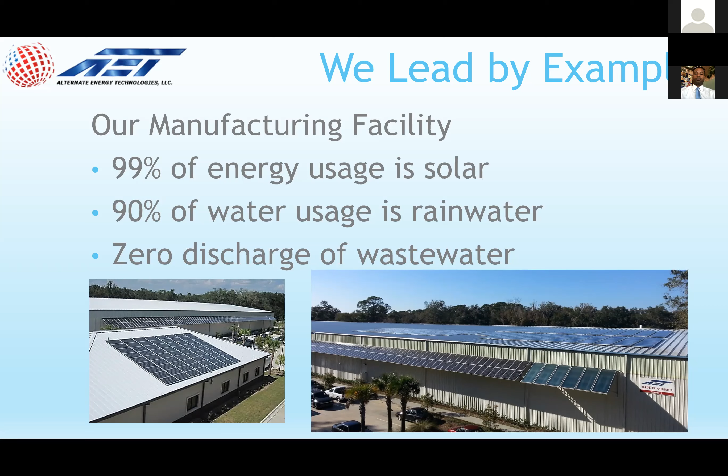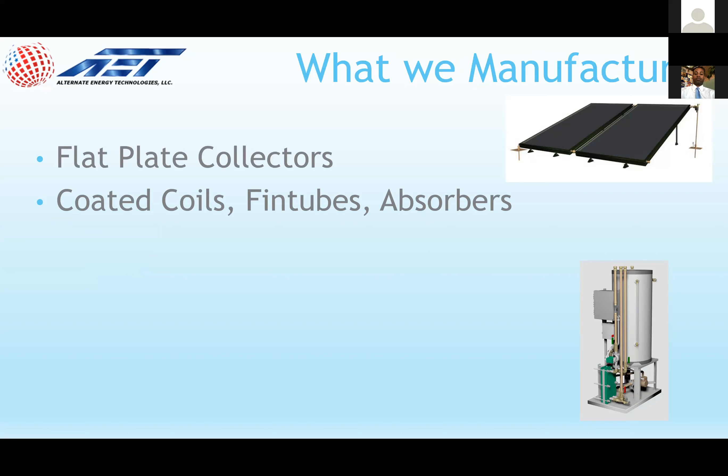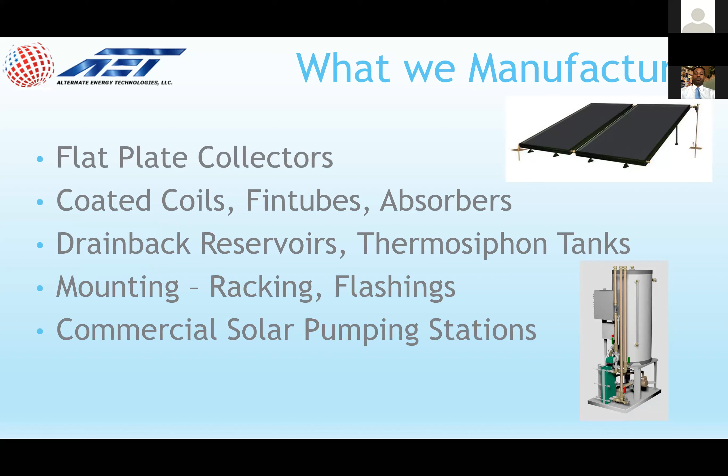So what we manufacture, in a nutshell, is the flat plate collector, of course, and, as I mentioned, the coated coils, fin tubes, and absorbers for other manufacturers on our Thermofin side of the plant. We manufacture drain back reservoirs with and without heat exchanger, and also thermosiphon tanks. And we have our own racking products, and we make our own flashings. And we do commercial pumping stations for both drain back and pressurized glycol.

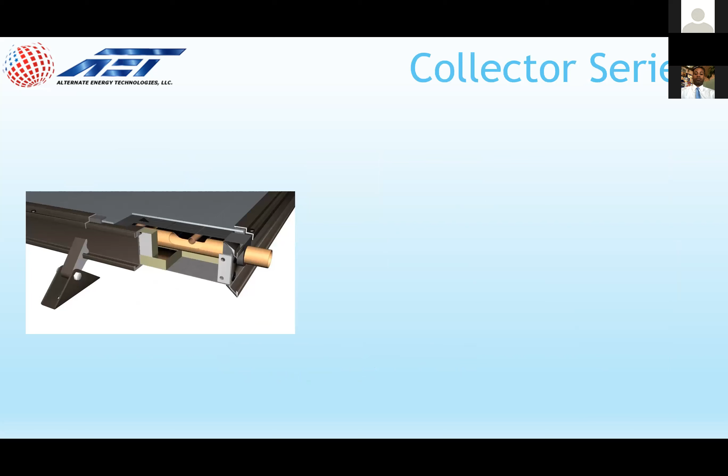The collector series: all of our products have basically the same absorbers inside with the selective coating. They're all copper. But the Morningstar has the anodized aluminum frame, and it's sort of like an I-beam finish you can kind of see. It's structurally very robust. We have 1-inch headers as our standard, and unions are optional. Some contractors really like them, some don't, so we can put those on if needed.

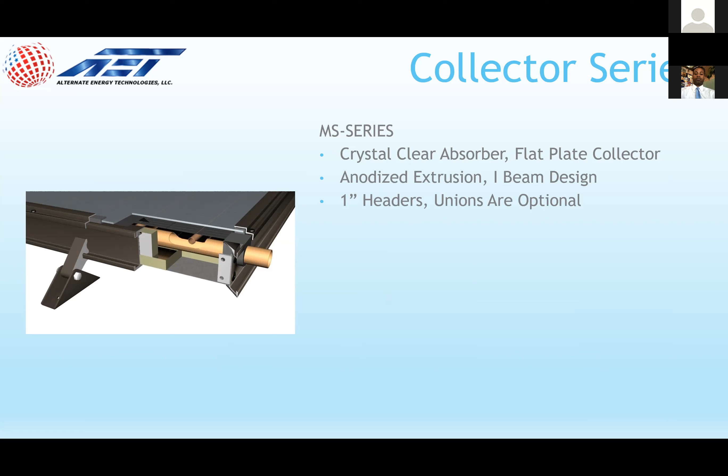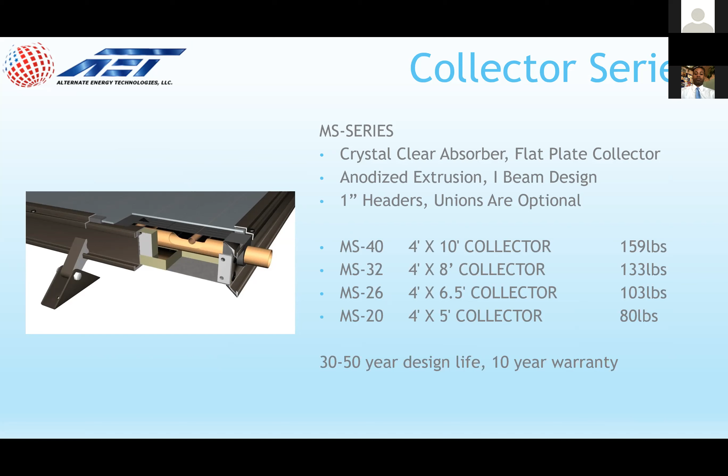We do make more sizes than this, but in general, these are our top 4. We have a 4x10, a 4x8, a 4x6.5, and then a 4x5, which is kind of square, kind of boxy. It's cute, and it's good for some applications. And then, as I mentioned, we have a 30 to 50-year design life with a 10-year warranty.

Some of the benefits of the Morningstar series collector is our anodized frame. As I mentioned, the I-beam extrusion, which is very durable, and then our mounting hardware is the best one on the Morningstar line. It's very, very fast and easy for rail mounting, for flush mounting. It's kind of like an alligator clip. It's very easy to use.

All of our absorbers are completely copper, so they're not made of any dissimilar metals. So they have a longer performance guarantee and are always repairable in the event of a failure or problem. And as I mentioned, they do have a 30 to 50-year design life with a standard 10-year warranty. Our warranty program, I'll highlight a little. We do have online claim filing. It's very simple.

We also have written into our warranty a corrosion provision. What that means is, in the state of Florida, we do a lot of direct open loop systems. And over the past 20 years, we've had a lot of water quality changes that can drastically affect a copper tube and an absorber plate, especially when being superheated by the sun. To combat some of those corrosion issues, we increased the wall thickness of the tube on our absorbers, and also added a 3-year provision to the warranty that if it corrodes in the first 3 years, we still cover it, even though that's not a manufacturer's defect.

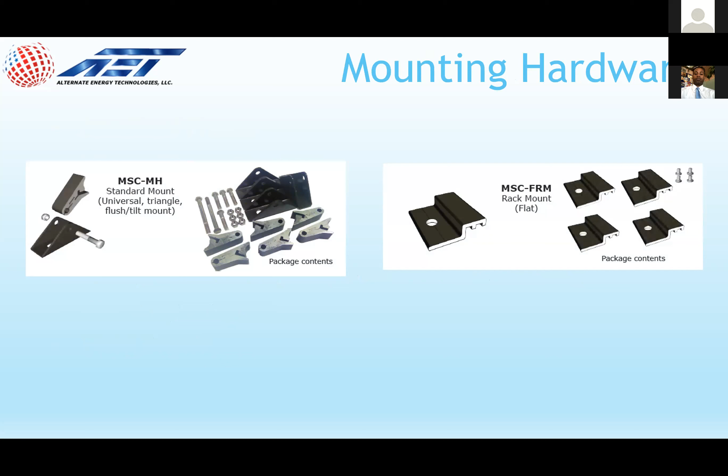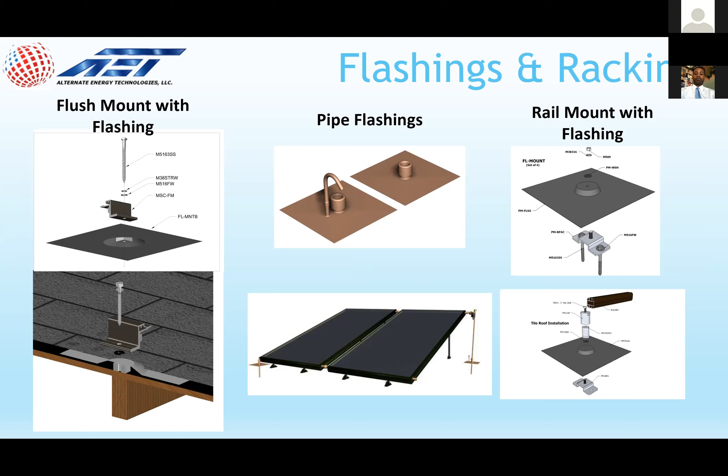And then our flush mount for flush-to-shingle roof. Our flashings, I'm just going to go ahead and get them all on. So the flush mount flashing we manufacture in-house. Our pipe flashings, which are copper, we offer in 3/4, ½ inch, and 1 inch with our little gooseneck for the sensor wire. And then our rail mount flashing as well that we manufacture in-house.

Of course, the opportunity for solar thermal, as we all know, is anyone that uses hot water. So what's your target market? Everyone. But no, commercial, high users, hotels, hospital, car washes, residential. Of course, you've got single family, multifamily, new construction, retrofit, and of course, any type of hydronic heating, space heating, radiant floor heating. And basically, we're just an energy source. So we can integrate into anything that uses or produces heat.

So solar thermal, as we all say, is the first step in going solar. It is the least expensive, most efficient use of solar energy, and it makes the most amount of impact of any renewable technology per surface area. I know that a lot of our contractors have been doing a lot more PV and they've been leaving thermal out. So I just want to highlight why it's important that we consider including solar thermal with all PV installations.

And basically one solar thermal panel, a 4x10, is the equivalent of about 6 to 9 PV panels. And there's a million different ways to run that, but I backed into it basically on production. So what we can offset is about 6 to 9 PV panels. And so for adding thermal to your product line, you have steadier margins, and it's a mature technology, and the prices aren't as cutthroat and volatile, with skinny margins, as some of the other products that are out there.

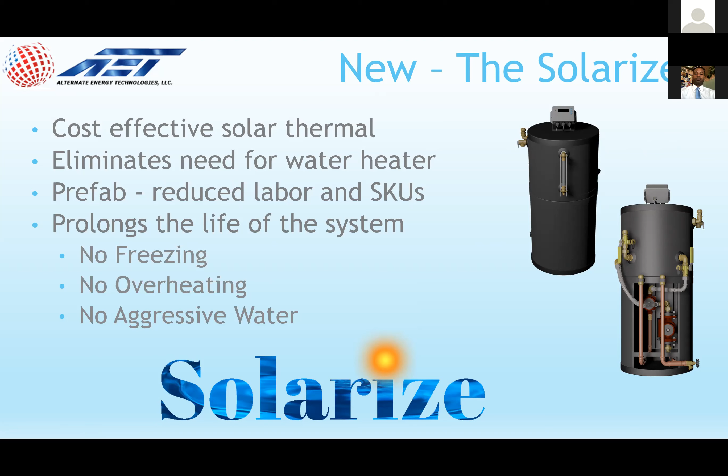Everything comes pre-wired, pre-plumbed, SharkBite fittings into the existing water heater, and they have their hot water within 30 minutes. No need to drain the tank. It reduces the amount of time on the job site. Very simple installation. On the other side of the coin, this is, again, what I call our Cadillac system, but the DBS Quick Pro is our stainless steel offering.

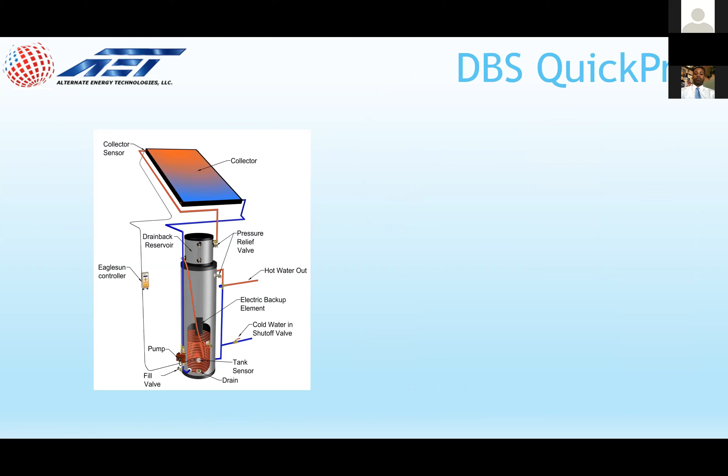So this particular system is very high efficiency. It does have a single wall heat exchanger submerged inside the water heater. It is safe. The heat transfer fluid is potable water in the system, and can be glycol. It could be either. It is an indirect. And there's less than 10 gallons in the solar loop.

I have a lot of guys that use direct open loop systems, and they worry about, oh, I apologize. Yes, someone asked if the Solarizer was a drain back system, and yes, it is. It's a different type. So we have two types. We have lots, actually, but I'm only going to highlight the two primary ones that we recommend as a manufacturer.

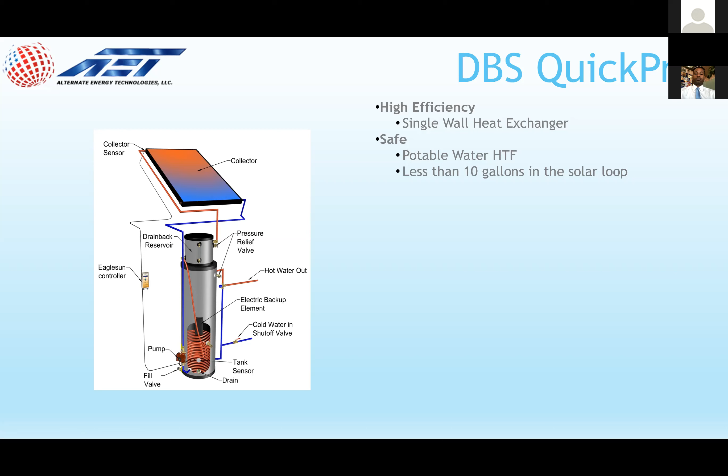But anyway, on the open loop systems, a lot of people worry about running pipe through attics knowing that that's city water pressure. And so the benefit of only 10 gallons or less in the solar loop just puts people's mind at ease as a contractor. So the system is very durable. It's stainless steel. There's nothing in the solar loop other than a pump. So not a lot that can go wrong, actually.

And then, of course, the drain back design, the standard no freezing, no overheating, or aggressive water to worry about. But also, there's no maintenance on the system. There's no anode rod. It's 316L stainless. It's top of the line, very nice system. It's a simple design with only one pump.

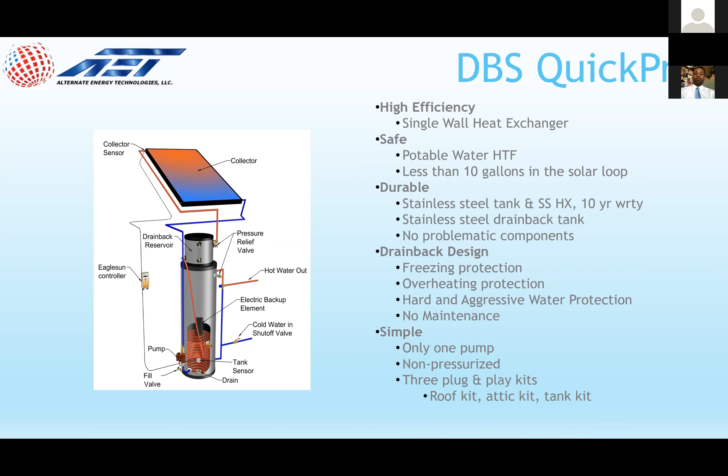So the Solarizer and the DBS Quick Pro are both drain backs, and we offer them with installation kits. So they have a tank kit, an attic kit, and a roof kit. It's very simple. There's no running to Home Depot and trying to cobble together all the parts you need. Everything comes in a box, saves a lot of time, and all you need on the job site is your tools. So it's very quick and easy.

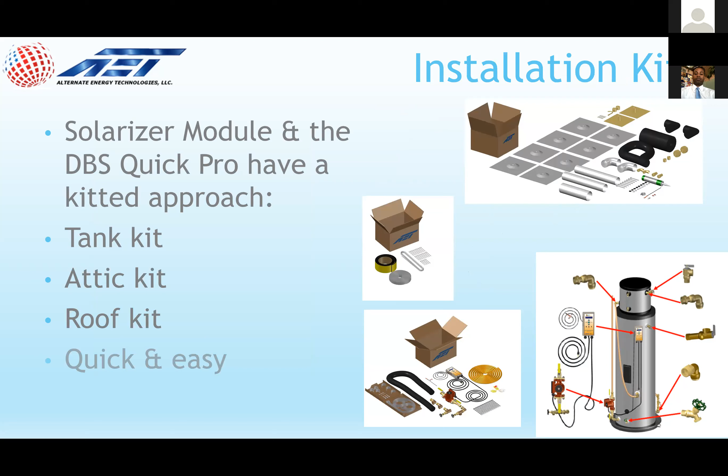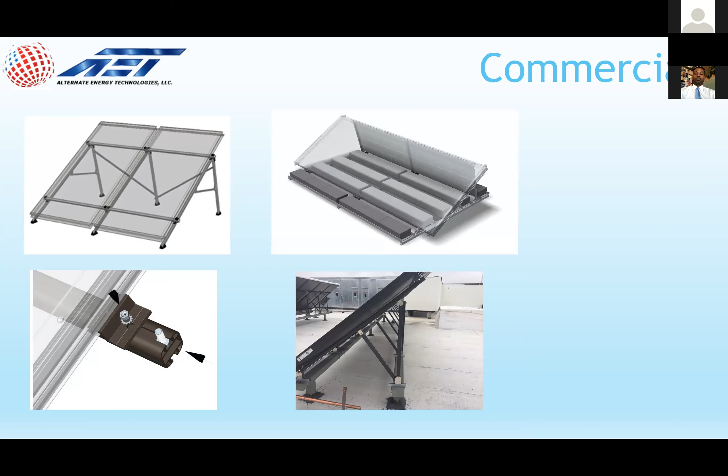On the commercial side, we have, like I said, our own racking products, and we provide solutions for basically any and all types of applications. We can design everything from mil-spec requirements down to value engineering to find the best solutions. We have racking strategies. We have ballasted systems. We have commercial pumping stations in both pressurized glycol and/or drain back. And they're on a skid, keeps it simple, very easy to install, reduces labor.

And so basically, say it again. Oh, yes, and we can pre-engineer the pumping stations for every application. We pre-engineer most of it, and then we just customize once the job is sold. And we do all of that in our factory, again, with ProPress fittings with a 50-year warranty.

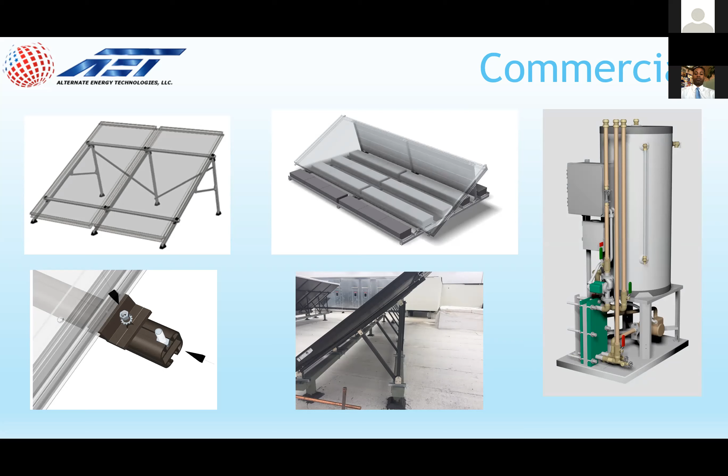So basically, combined with UMA, we have the ability to take it all the way from pre-feasibility to construction to completion. And we can follow all of this up, of course, with spec books and sales presentations and manuals. But we are here and ready to help. We want to continue to grow the solar thermal industry, and we've got a lot of exciting stuff in R&D that I won't bring up today, but you'll be seeing a lot more of us with UMA soon.

Yeah, so Tara, I have a question. I had to pull off the webinar for a second to take a call. When we were talking about the collector design, exactly the Soline collector, you mentioned a couple different product lines. How is the Soline collector going to be to UMA specifications? Can you kind of define what that's going to be?

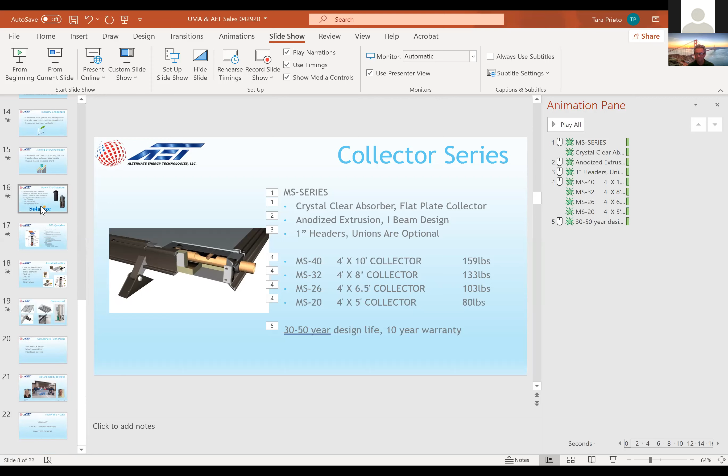Because I didn't really understand, I didn't get that part. Or do we need to get like a Rheem or a Lochinvar tank, or are tanks coming from the manufacturer's? It depends. So with the Solarizer product, you can go either way. You can install it with a solar storage tank if you want to increase the storage, or if they want to use their existing electric water heater, you can just plumb right into it. It's very simple.

So like in a builder situation where they want to use their existing, or retrofitting a brand new home after the home is sold, you could always retrofit what's there because it's brand new. Some solar is better than no solar. And the other thing I found is that if their element goes out, it's a standard off the shelf product. They can go to the Home Depot, get a new element. You're not getting the callback on the water heater problems because you didn't install the water heater. You're just using the sun to provide the heat. Yeah, that makes sense.

I just like giving them an all-inclusive package as much as possible, because that's what they want, you to handle as much of it as possible. That's how home builders are. Well, and not only that, if you provide a solar storage tank and they were already buying an electric water heater, you can have a takeoff. Like, you're not buying this, now you're buying this, it reduces the amount that's going to the builder. You see what I'm saying? So instead of paying $400 for this water heater, reduce what you're paying us by $400, and it's only an increase of this much. So it makes it a little more palatable, maybe.

Awesome. Question. On the kits, what do you use for the lines going up to the roof? It's just the standard copper refrigeration tubing. And we can actually run 1/2 inch instead of 3/4 on some of the systems, which reduces the cost, obviously, and also all of the fitting sizes and everything. So you can use the 1/2 inch soft copper or 5/8.

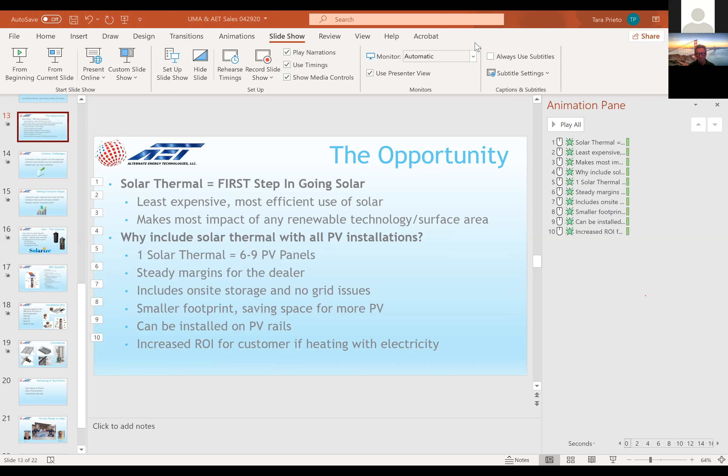While we're still on this page, can I share my screen? Sure. Let me see if I can. Can I do that? New share? You just unshare yours and I can share mine. Unshare. That would make sense if I knew how to. At the top, top center. There you go. Okay.

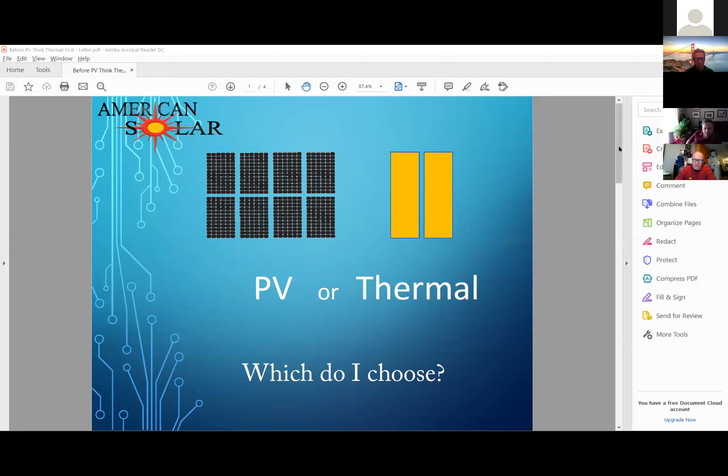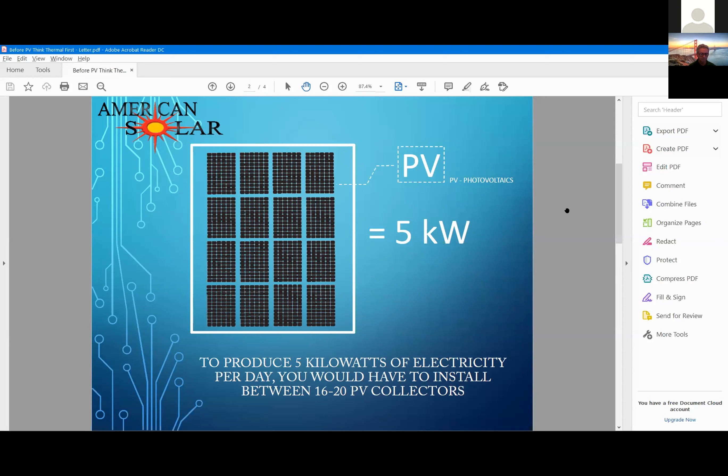Okay, share screen. I created this little graphic here, and I have this for customers to look at. PV or thermal, which do I choose first? I show what your roof would look like with a PV system and how much it would produce. Then I switch over to a thermal system, show that it produces about the same thing. And down here I show if you think thermal first and then fill the rest of the space with PV, you end up producing more energy in the same footprint. So the answer is choose both.

That's perfect. I want a copy of that. Can you send me a copy of that? Yeah, absolutely. That's really great, because that's exactly what I had one guy in North Carolina do. Everyone else couldn't figure it out. I'm like, thank you, that's exactly what we need to be doing. I love that. That was awesome, Joel. Nice job, man.

Great job. Hey, no problem. Thank you. Yeah, I'll share it with you guys. You fancy it up, make it look better, and send it back to me. How about that? Make it look awesome. That is professional. This is the homemade version.

It's funny because that's what you've got there. If you try to compare thermal and PV, it's power and energy, two different things. It's just very complicated. So after running it about 7 different ways, I just backed into it and said, well, it offsets this much, and we'll just call it a day.

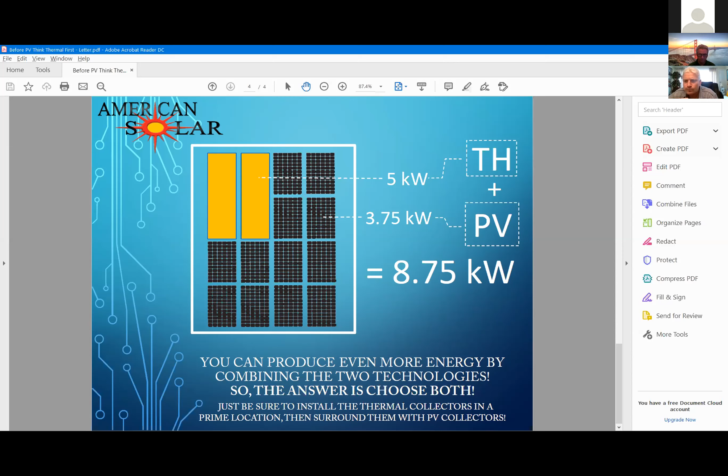Well, one of the things that I did to work with people on that one is I converted BTUs to watts. So on my calculator spreadsheet, let me see if I can pull that one up. That's what's smart about it. That's what I like, Joel. Yeah. So let me pull up this file and update, give me 1 second here. Almost there. Okay. Let me share this screen.

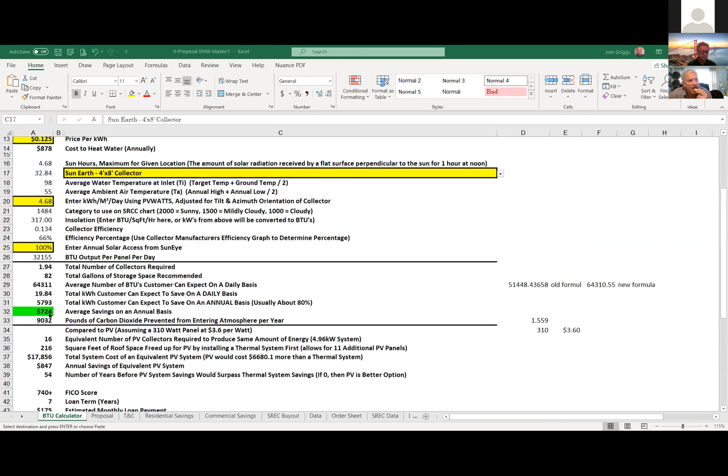So this is my little spreadsheet calculator, and I just go in here, I change some variables, and then down here, it does all the calculations for me. And one of the things that I did was I did compared to PV. So I can come over here and I can change the numbers to match whatever current prices are. Oops, not 303. And what it will do is it'll just do some quick calculations, and that way you can have an apples to apples comparison of, yeah, this thing is producing BTUs, but if you want to compare it to watts, here's your comparison.

That's outstanding. That is awesome. Thank you.

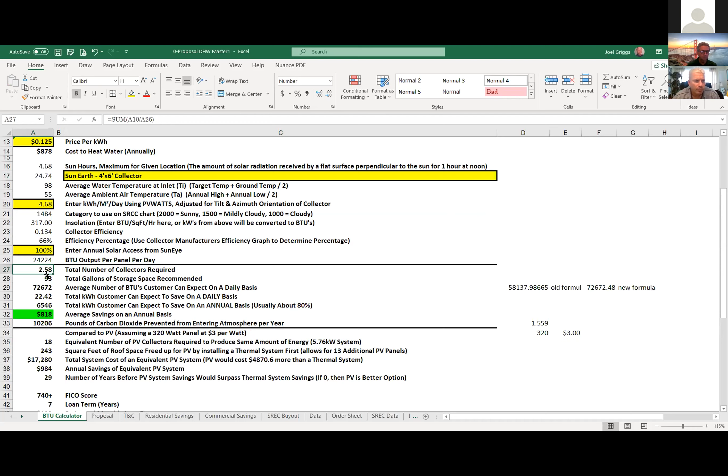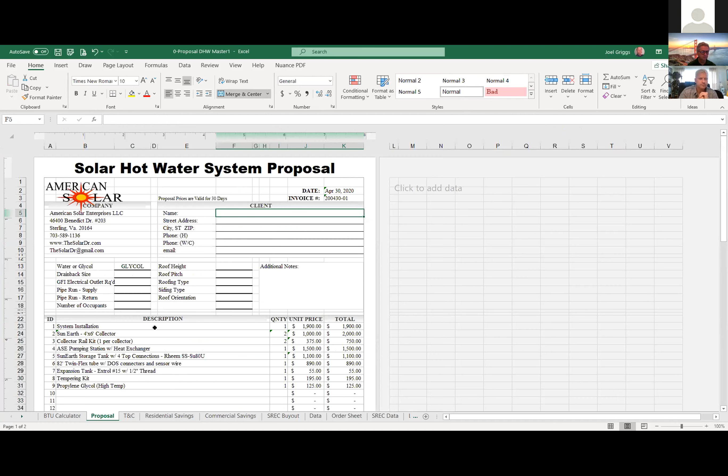And then I just have that, it goes straight over into the proposal. So as I change things over here, say I'm going to use some 4x6s, it tells me how many it's going to use. So like if I family of 3, there I'm going to use 2 4x6 collectors, and then come over to the proposal, and it automatically updates everything for me. And then I've got a little comparison. So it has your ROI calculator. So put a little time into my spreadsheet here.

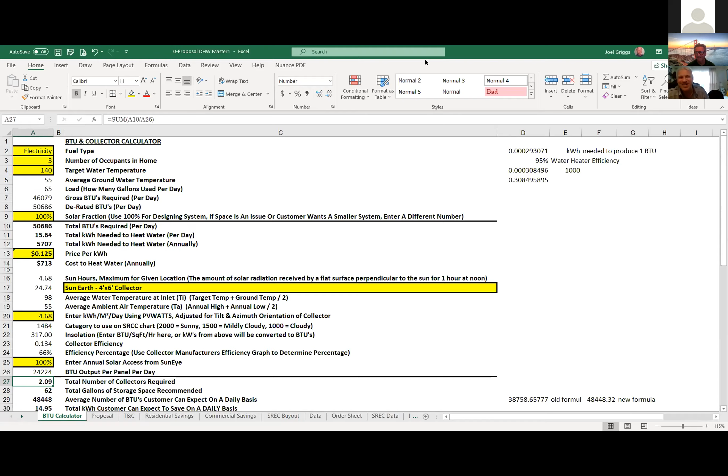That's awesome. Man, Joel, that's impressive, brother. Yeah, thank you. It's been years in the making, but... Well, you nailed it. You knocked it. Say, how much are you selling it for? What's that? How much you selling a copy for? Yeah, right? $1 billion. $1 billion. So, love it. Yeah, I'd be glad to share any of my calculations, whatever, if anybody's interested. Just the image alone says enough. I mean, the image alone is beautiful.

It started out very simple. Actually, I honestly have to say it started at AET, because I was down there for my first class, and I started getting all these different formulas and calculations, and we were doing it on paper, and then if one thing changed, you had to go all the way back to the beginning and start over again. And I was like, there's got to be a better way. And I was like, Excel. And so I started out, I put a couple formulas in there. I'm like, hey, look, it works. And then I started building and building and building. And next thing you know, I got this multi-tabbed spreadsheet. That's how my mind works. I'm an Excel queen. I love it.

And we have one actually for racking that Dean just built, and you put in general information, and it populates with an image of what the rack will look like, a design with all of the bill of materials in it. It is so, oh my gosh, sales are over. We're so happy. Perfect. It's what we've always needed. That's what I aspire to.